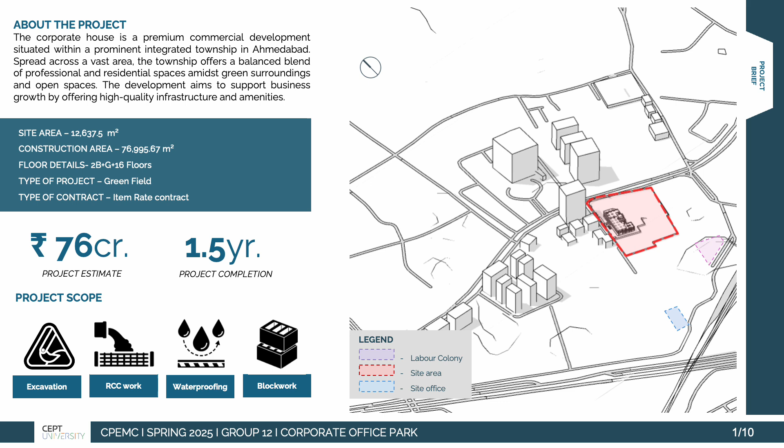The greenfield project has two basements and ground plus 16 floors, with a site area of 12,637 square meter and a construction area of 76,995 square meter. The project estimate is 76 crores and an item rate contract is being utilized. The scope of work includes excavation, RCC, waterproofing and block masonry, while the estimated time of completion is 1.5 years. Shown in the map is the site area, labor colony and site office.

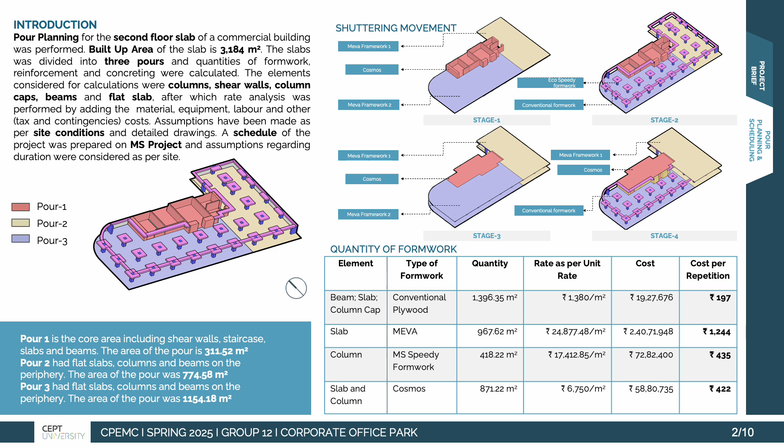The total cost per repetition which was considered for the final calculation came up to rupees 197 per square meter for conventional formwork, rupees 1,244 per square meter for MEVA, rupees 435 per square meter for MS Speedy formwork, and rupees 422 for Cosmos formwork. The productivity of labor for formwork came up to 0.39 square meters per man-hour.

Next is reinforcement. Reinforcement calculations were carried out for all elements of the floor. The assumptions considered for calculations are as follows. A floor height of 3.6 meter was considered. Cover margins were taken as per site conditions. Bend deduction of minus D was taken for every 45 degrees. Lap length was taken as 50D, as per drawings, and a wastage of 3% was taken as per contractual conditions. Based on these assumptions, a bar bending schedule was prepared for the floor.

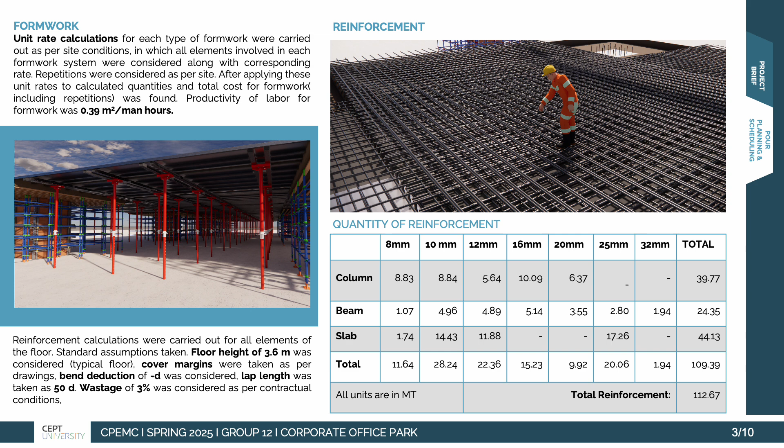For columns, the quantity of steel came up to 39.77 metric ton. For beams, 24.35 metric ton, which is due to the presence of the flat slab, so the beams are only present on the periphery. For slab, it came up to 44.13, which is due to the presence of 25 mm triple layered steel as shown in the table. The total quantity of steel for the floor was 109.39 metric ton. Including wastage, 113 metric ton of rebars are required for the floor.

Couplers are used for rebars having dia of 16 mm or more, and the coefficient of reinforcement was calculated to be 35.77 kg per square meter. Tower crane and steel yard machineries, which are bar bending, cutting and threading machines, were considered for owning and operating cost. Shown in the graph is the monthly requirement of steel in 2025, and as seen, the peak is in May 2025.

Next is concreting. Concreting of M40 for slabs and M55 for columns happens on site through a stationary boom placer. The location of the boom placer is shown in the concreting plan in blue, and a concrete pump and pipeline are available on site. The concrete pump is placed near the main gate as shown in red in the concreting plan.

The quantity of concrete for each element was calculated: for columns it is 593 cubic meter, for beams 98.14 cubic meter, and for slab and column caps 215.59 cubic meter, and the total concrete quantity required for the floor is 905 cubic meter. On the top right is the total cost of construction for the floor, which is calculated for each element, that is formwork, reinforcement, and concreting.

And the cost includes material, labor, owning and operating, and others. Other includes tax and contingencies. So total cost for formwork came up to be 41.6 lakhs, for reinforcement 109 lakhs, and for concreting 66.1 lakhs.

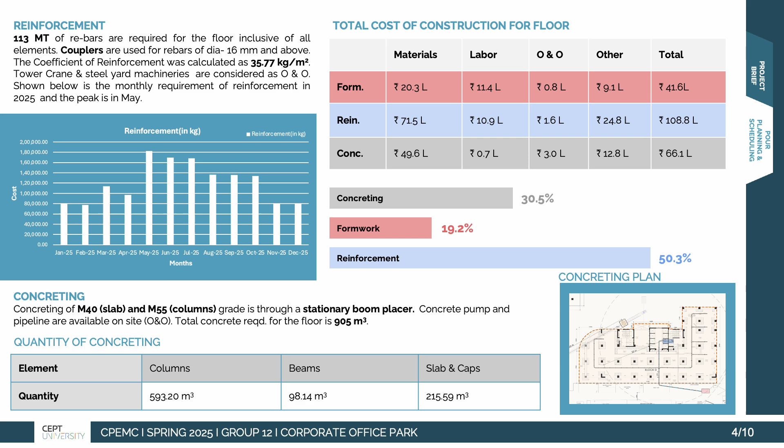Next is the tool of quality. We established control limits for compressive strength test of concrete of M40, which is used in slabs. The results of compressive strength tests were taken from the on-site cube register, and one sample set contained 3 observations of compressive strength of cubes.

The table shows the X bar, which is the mean of compressive strength, and the value was 48.65 kilonewton per millimeter square. R bar was the mean of range, which was 3.32 kilonewton per millimeter square, and R bar is the difference in compressive strength of observations within one set.

The constants are also shown in the table along with the upper and lower control limits which we calculated for compressive strength as well as range. The IS standard deviation limits are also shown, which are plus and minus 15%. So X bar is the mean of values of compressive strength, and it indicates the average compressive strength. 36 sets were considered, and each set had three observations.

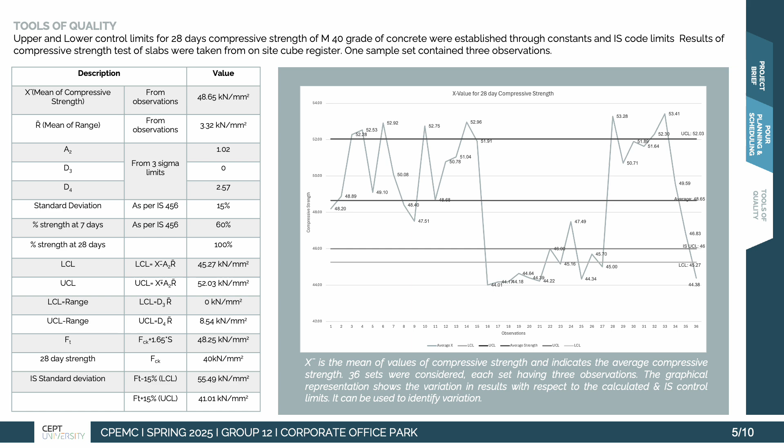The graph represents the variation in results with respect to the calculated and IS control limits. So the straight lines are the upper control limits. The second one is the average, which was 48.65, which is X bar. And variation of the results is shown in the graph, with the lowest observation coming up to be 44.01 kilonewton per millimeter square, and the highest one coming up to be 53.41 kilonewton per millimeter square, which are all well above the desired compressive strength for M40 grade of concrete.

An Ishikawa diagram was prepared for a non-conformity identified on site, which is honeycombing of a shear wall. The causes for the non-conformity were identified, and the root causes for the problem were poor workability of concrete, haphazard work, lack of tamping, and not using proper equipment, that is not enough vibration, not enough use of needle vibrator.

A Pareto chart was prepared for the non-conformities and cost of rework. So non-conformity reports are submitted on a monthly basis by the client to the contractor. And after bifurcating all the non-conformities through 6 months of NC reports, a Pareto chart was prepared to identify the highest occurring non-conformities and their corresponding cost.

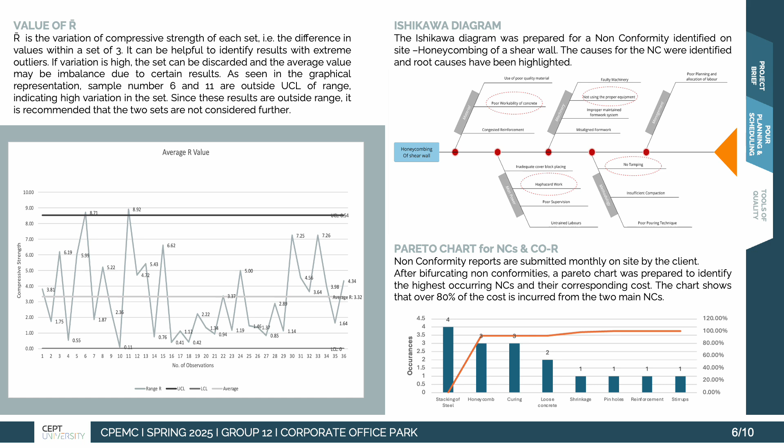So as seen in the chart, the top two non-conformities are mainly honeycombing and stacking of steel, and the cost for rework is mainly in honeycombing. So it shows that over 80% of the cost incurred is due to the main non-conformities.

So work sampling is a lean technique used to prepare a statistical sample of how much time workers are allocating to activities. The methodology followed for tour-based work sampling was firstly the characterizing of the area which was to be observed. Second is categorization of activities in the tour. Third is identification of the route which was to be followed. Then there was preparation of data sheet and collection of samples and analysis of those samples.

So the activities were bifurcated into value adding, non-value adding, and non-value adding but necessary tasks. Tours were performed every 30 minutes through a fixed route. The fixed route is shown in a 3D spaghetti diagram, which shows that the tour started at position 1, which is the entry of the site. Position 1 was the steel stacking yard where steel was stored. Position 2 was cutting and bending yard. Position 3 was the shuttering yard for maintenance of formwork.

Fourth was the area of block work, while fifth was the area of shuttering. Positions 6 and 7 show the place where reinforcement work was going on the second and third floor. Position 8 is where formwork and slab cleaning was going on the third floor, and the tour ends at position 9, which was reinforcement at the fourth floor.

Tours were performed every 30 minutes, and 16 observations were made for 2 days. Observations were taken from 9 a.m. to 6 p.m. with a lunch break from 1 to 2 p.m. The tasks that were observed were reinforcement, formwork, block work, and miscellaneous works. And the sub-activities of each of those tasks were allocated into value adding, non-value adding, and non-value adding but necessary.

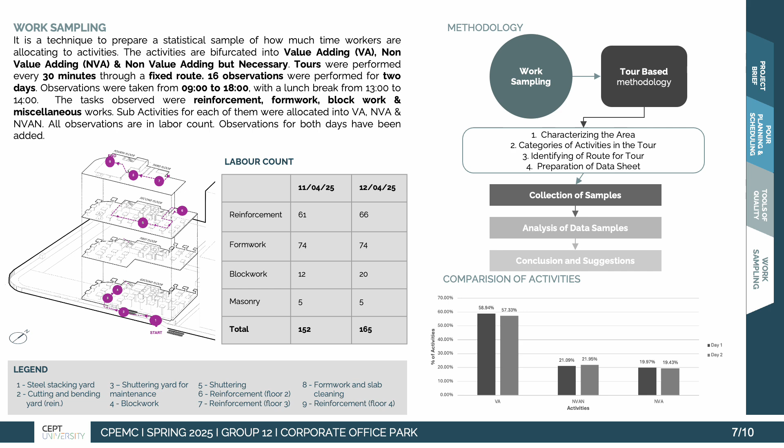All observations taken are in labor count, and observations for both days have been added for the analysis. The labor count for 11th was 152 and for 12th was 165. The graph on the bottom right shows the comparison of activities, which is the comparison of VA, NVAN, and NVA for both days.

The table shows the observations of labor counts for each tour that happened every 30 minutes. So for example, from 9 to 9:30, we observed 128 laborers performing value adding activities, 44 performing non-value adding activities, and 50 performing non-value adding but necessary activities. And the frequency distribution of observation shows the time ranges where workers were performing most value adding as well as the least value adding.

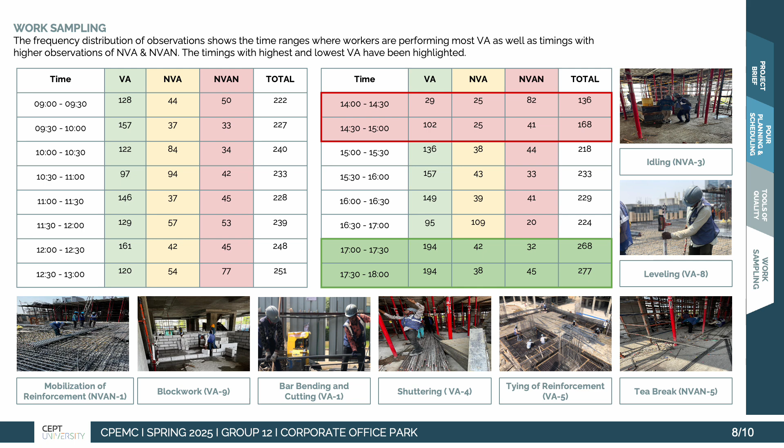So the red highlight shows the time of 2 to 3 where the least value adding activities were being performed and NVA was higher. And the green highlight shows the time where most value adding activities were being performed. We carried out time-based, activity-based, and location-based analysis for our observations.

So for time-based analysis, we bifurcated the observations into 3 time periods, which were 9 to 11, 11 to 4, and 4 to 6. And as seen in the graphical representation, we prepared a graph of samples per minute due to the time difference and time intervals of all 3 slots. And the graph shows that the third time period of 4 to 6 has the highest value adding activities, as the workers have to finish their assigned tasks by 7 p.m., so they are rushing to finish work.

NVAN is higher in the first time slot of 9 to 11 as it includes time for mobilization of tools and materials, while NVA is highest during the slot of 11 to 4, which coincides with the lunch break as workers return late and are working leisurely.

The activity-based analysis shows the bifurcation of VA, NVA, and NVAN for each activity we observe. Formwork and reinforcement have a similar spread of VA, while the key difference is NVA, with reinforcement having less NVA due to it being critical to the casting of slab and as it has more supervision. And the pie chart shows the bifurcation of value adding, non-value adding, and NVAN.

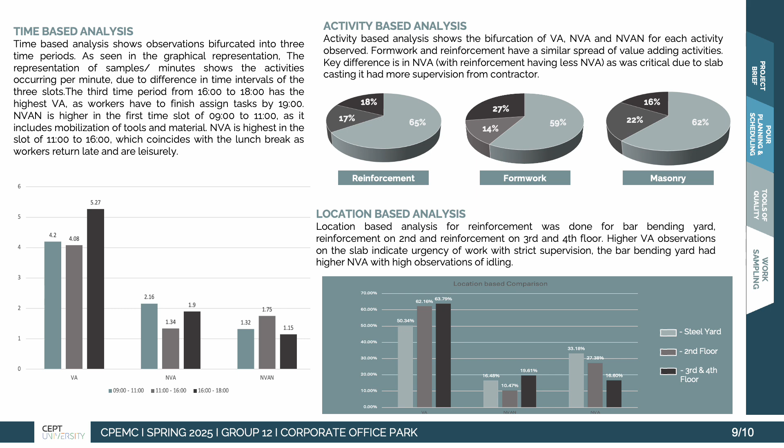The location-based analysis for reinforcement was done for the bar bending yard, reinforcement on the second floor and the third and fourth floor. Higher observations in value adding were on the slab due to the urgency of work, and the bar bending had a higher NVA with a lot of observations of idling in the bar bending yard. So last is the conclusion.

For pour planning, we prepared a schedule for the project on MS Project as per actual site holidays and working hours. The schedule was used for duration of activities. Finding quantities of all of these major activities helps with ordering and material management as well as smooth execution on site. Labor productivity of each activity was calculated.

For formwork, it came up to be 0.39 meter square per man days. For reinforcement, 0.11 metric ton per man days. And for concreting, it was 2.84 and 1.35 meter cube per man days, respectively, for slabs and columns. The cost of construction for the floor came up to be 2 crores 15 lakhs, out of which reinforcement had the highest weightage of around 50% of the cost.

The reinforcement to concrete ratio was calculated to be 125.74 kg per meter cube, and the coefficient of reinforcement was calculated as 35.77 kg per meter square, while the coefficient of concrete was 0.28 meter cube per meter square.

For tools of quality, we identified UCL and LCL through which we were able to identify anomalies in the compressive strength testing. The chart for X bar, however, did not show any anomalies as all of the observations were within acceptable limit as per IS code as well as calculations. However, few results were above the upper control limit, which generally does not cause problems. However, it may cause problems due to higher rate of hydration due to the higher compressive strength.